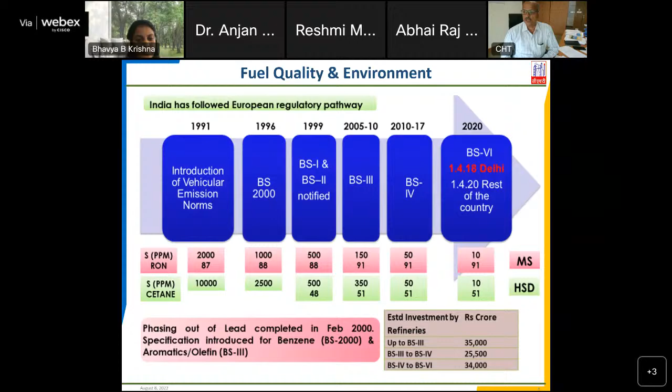Now the environmental consideration: the main objective is to remove carbon from our operations. We will only require hydrogen in future.

Next, I'll go to primary energy as per the IEA. In 2019, we had 900 million tons of oil equivalent in primary energy, and they have projected different scenarios.

One is STEPS, the Stated Policy Scenario. Because of COVID, they introduced one more scenario, the delayed recovery in the post-pandemic world. The Indian vision is the third scenario, and the most optimistic is the Sustainable Development Scenario, where you have to meet all the agreements and environmental targets. In all four scenarios, oil demand, which is around 230, is going to increase, except in the last scenario where it's a marginal increase.

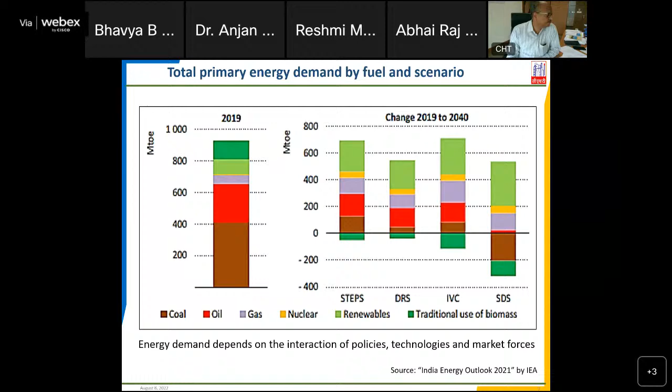As per IEA, these are the different policy scenarios I explained.

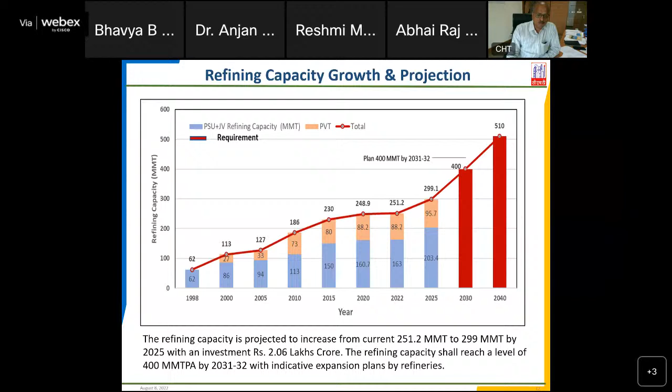Refining capacity projections: we are now at present 251 MMT per annum. With approved plans, we are reaching around 300 by 2025. Our demand required will be 400 MMT by 2030 and 510 by 2040. As such, we are in surplus in refining capacity. We are exporting products and want to maintain that lead position in exporting oil to the rest of the world. So there will be 2.06 lakh crore investment required for going up to 400 MMT capacity by 2030.

So what are the challenges? Volatile crude prices and cracks, sustaining refining margin and profitability. Our friends may be aware that in the oil industry, now all the oil companies have declared huge losses. Issues of water availability and land for new refineries is also one of the major issues. And building flexibility, fuel versus petrochemicals - fuel demand is shrinking and petrochemical demand is increasing. And climate change - we have to meet the climate requirement, so emissions from our operations have to be reduced. We have to divert into green hydrogen, biofuels, SCNG, etc. And disruptive technology - what is the impact on oil demand, which is a long-term threat to the oil refineries.

If you see price volatility, it is hovering around 140 and now again come to above 100, sustained post-pandemic. So refineries are more competitive when crude prices are low. When it is high, then they have a problem because prices are controlled. We are not passing the full price to the customers because of the developing economy, and our consumers also - government is very sensitive to increasing the prices and passing it on to the customers.

Sustaining refinery margins and profitability in the current scenario - typically refinery accounts 6 to 10% as fuel and loss, and reducing this will improve profitability. We have a benchmarking study of all the PSU refineries, there is an equivalent of $1.08 benefit existing by reducing the energy intensity. The most energy efficient plants have small steam systems, but we have very big steam systems, steam-driven turbines and all those things. So that has to be reduced, and we have to go for power systems.

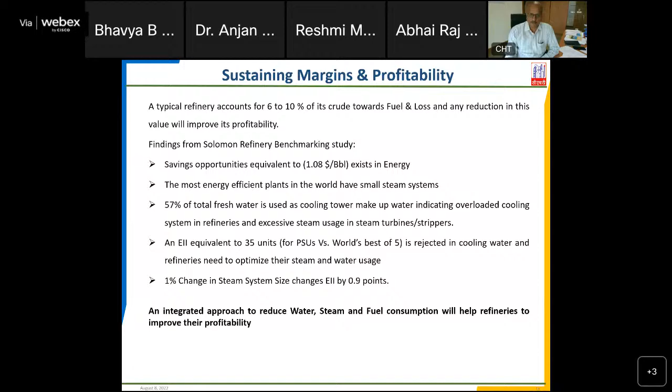Second, the water crisis - our refineries consume 70 to 170%, depending on their location, more than crude throughput. For 1 ton of crude, we require 0.7 to 1.7 tons of water. Water is more scarce in the coming future, so there is pressure on industry to recycle water and minimize fresh water makeup. We have seen refineries putting up desalination plants, like MRPL, CPCL, and even in Mumbai there is a huge water cut for refineries when summer comes. So this is also one of the challenges for refineries.

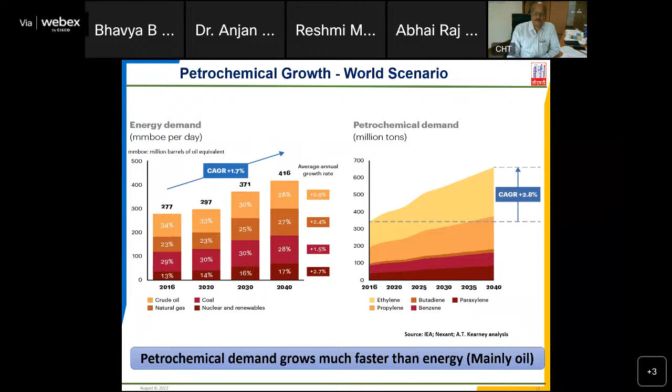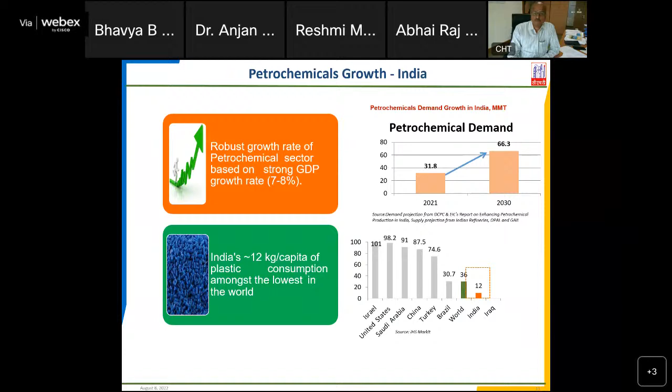Sorry, somebody is sharing something else. Hello? Sir, can you please reshare it, sir? I think somehow it's got cut, we're not able to see your slides now.

Yeah, there is a growth in petrochemicals. Now we can see your slide. There is a need for integrating refinery with petrochemical, since oil, there is a growth in petrochemicals.

If you see climate changes, as you are aware, 17 of the last 18 warmest years on record have been since 2001. 410 ppm CO2 concentration is the highest level ever. The rate of ice mass loss in Antarctica has tripled in the last decade. Global sea level rise in the last century has been about 8 inches.

However, these are the impacts to the refineries, because refineries emit scope 1 emissions more, and there will be pressure on refinery operations. The scope 3 emissions, whatever fuel they sell in retail outlets or to consumers, is also a factor. There is pressure on refineries to reduce their energy intensity, as Indian refineries by design consume more energy than their peers in the world.

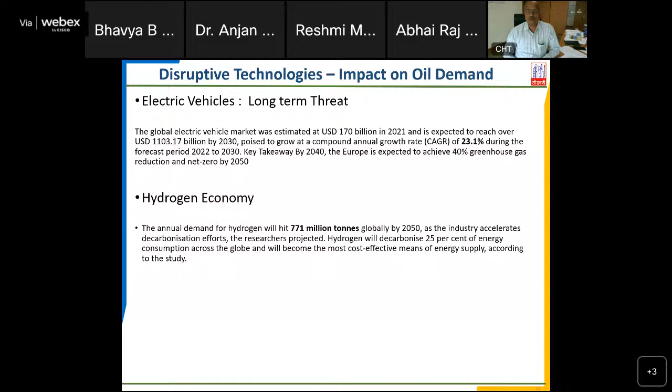Now, what are the opportunities and pathways for the refineries? Refinery integration is key to future sustainability. You have to align with biorefineries, petrochemicals, hydrogen, and feed diversification, to improve and sustain your operations in the near future.

For petrochemicals, there are different products required, and refinery gives excellent feedstock for production of petrochemicals. The indicative IRR of a typical standalone refinery is 11 to 12%. If integrated with petrochemicals, it's 16 to 17%. Most PSUs started with fuel refineries because there's an obligation to meet customer requirements. Now with fuel demand shrinking, we have an opportunity over the next two decades to increase the intensity of petrochemicals from our refineries.

For biorefinery, government has mandated increasing ethanol blending in MS. By 2030, it has to reach 20% ethanol and 5% biodiesel.

So for biorefinery, you have to use biomass, treat and process lactic acid from C6 sugars - lactic acid, PLA, petrochemical, or ethanol is the route. These can be blended into MS, and reduce the energy import requirement of the country.

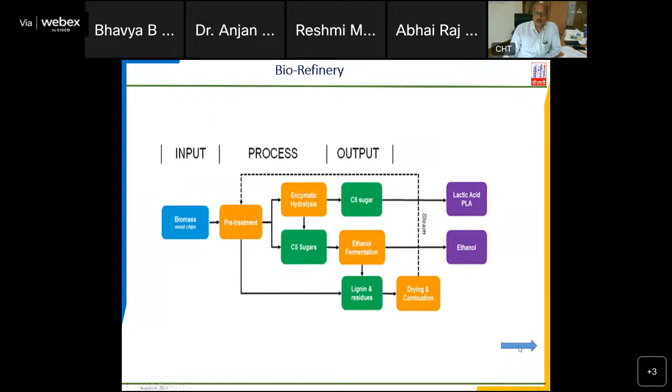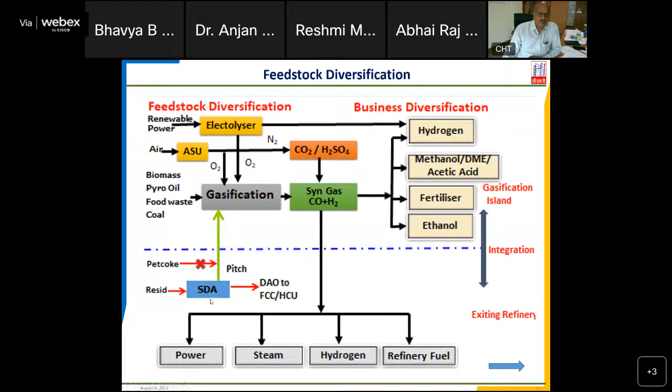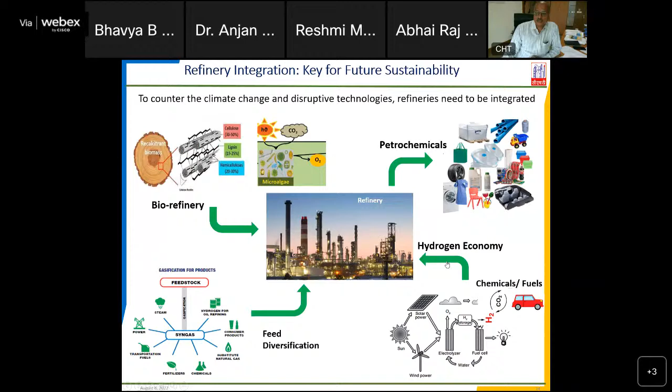Then hydrogen economy - green hydrogen is now a buzzword in the world. You have to produce it from electrolysis of water, and whatever CO2 you capture from hydrogen production, you use with green hydrogen to produce ethanol, fuels, chemicals, or fertilizers for sustaining operations.

So in conclusion, refineries have to diversify into biofuels. You have to produce sustainable aviation fuels - this is also one of the requirements. Now India, by 2026, CORSIA applies. In future, we have to meet green aviation requirements too.

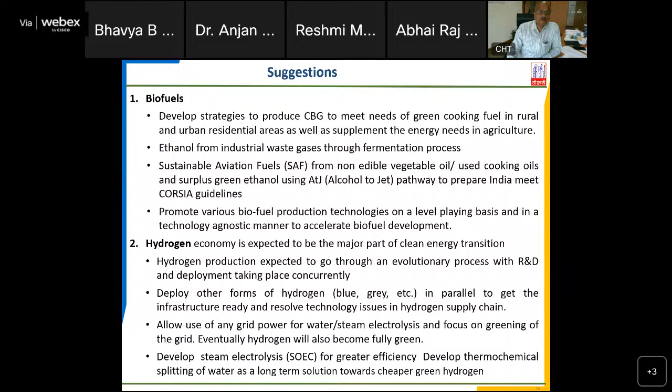Hydrogen is one of the areas. By 2047, India aims for energy independence. For this, we have to look into biofuels, hydrogen, and coal gasification to methanol. We have huge coal resources, so that will be sustained - you have to make methanol and use it for substituting oil and gas.

In refineries, at present some are still using furnace oil or LSHS. This has to be changed to gas to reduce their scope 1 emissions. There are leaks in SMR - you have to identify methane leakage through digital intervention, and subsequently it's captured for use as fuel. Solar and wind, wherever possible, should be used in our refineries.

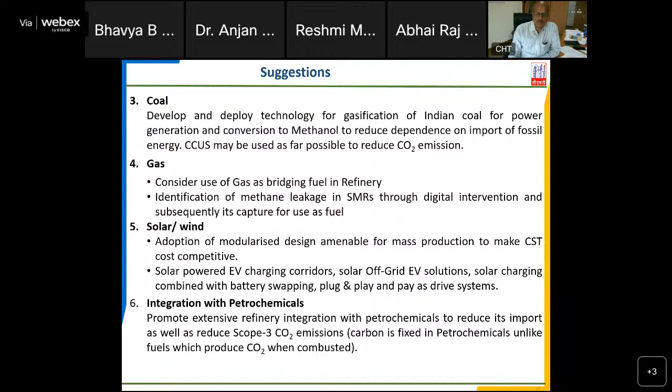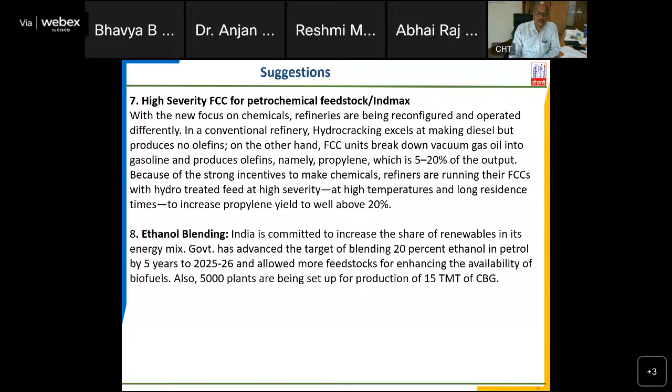Integration with petrochemicals - as already stated, even if you divert into petrochemicals, your scope 3 emissions will come down compared to producing fuels; petrochemicals will reduce the intensity of operations. High severity FCC and petrochemical feedstock technologies are available, and ethanol blending has already started, targeting 20% ethanol petrol by 25-26, with CBG as another option. Thank you.

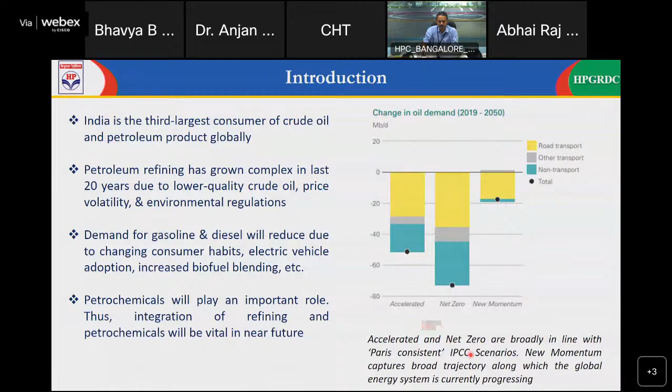So there is a lot of integration of the refining and the petrochemicals, and that's the talk of future integration in the refineries, and we are also talking about crude to chemicals. On the right side of the graph, there are three approaches: one is accelerated, second is net zero. Accelerated and net zero are broadly in line with the Paris consistent IPCC scenarios, and new momentum, where we will be achieving around minus 20 million barrels per day reduction by 2050. So new momentum captures the broad trajectory along which the global energy system is currently progressing.

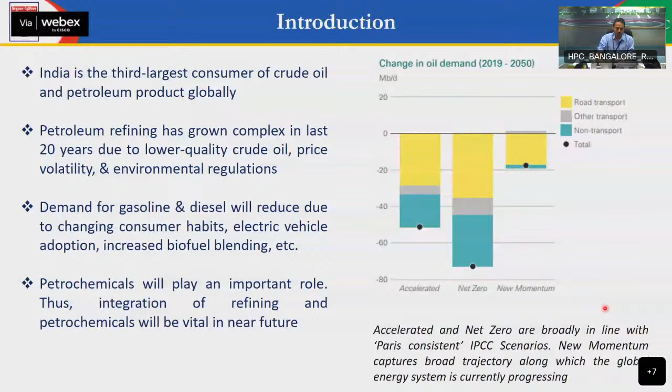So now if we see the timelines, how different technologies have emerged in the refining industry and where we are progressing. In the scenario of 1860 to 1920, mainly we had all primary processing units like ADU, VDUs and all. In 1930 to 60, FCC, alkylation, hydrotreating, solvent extraction came into the picture. Then 1970 to 1990, we have all bottom upgradation units like residue hydrocracking, gasification, dewaxing. From 2005 to 2015, the integration of petrochemicals with refining and high severity FCC came into the picture.

From 2015 onwards, there is talk of all green technologies, biofuels, drop-in fuels, green hydrogen, carbon capture and sequestration. Now 2020 onwards, there is a lot of talk and technologies coming in the area of crude to chemicals. It can be a deep integration or it could be a direct conversion of crude to chemicals.

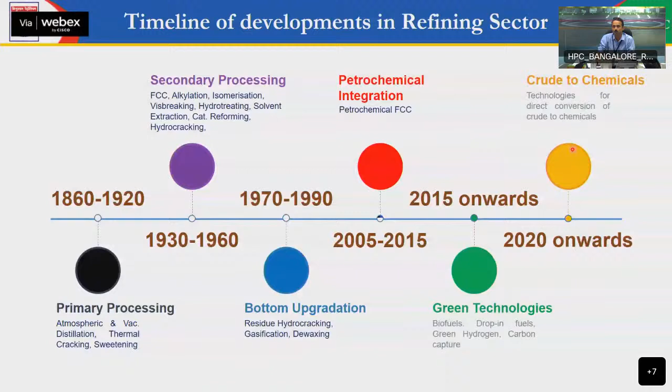So if we see the current focus of the refining sectors, mostly we are covering crude to chemical technologies, different catalyst and materials advancement. There is a lot of intensification on process and reactor designs, then carbon capture technologies, and going forward, there are a lot of activities or commercializations happening in the area of co-processing of renewables in the refining sector. So I will be subsequently discussing all these 5 topics.

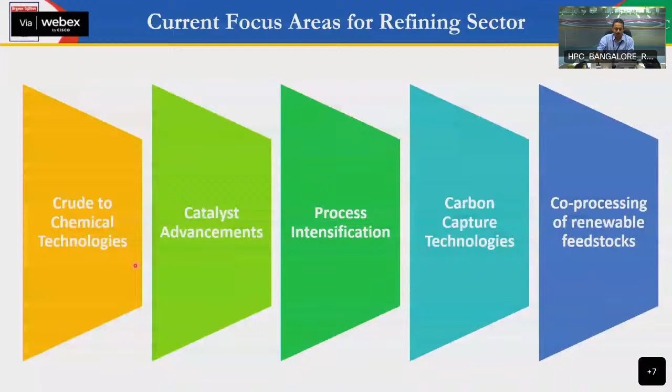So let's talk about crude to chemicals. If we see this GDP growth, the demand of olefins and aromatics from 2020 to 2050 is surpassing the GDP. That means there is significant demand of olefins and aromatics, and that's a key thing for the refining industries to go towards petrochemicals.

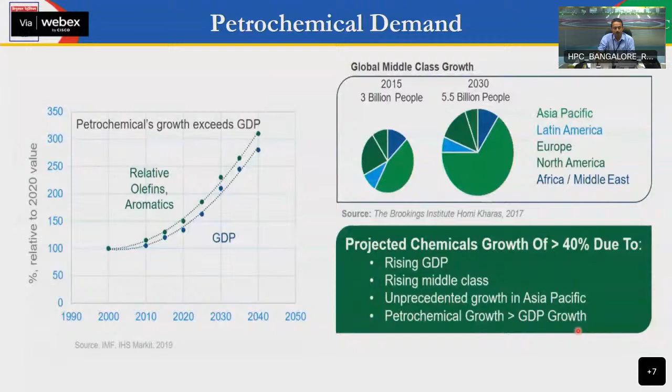The right side figure shows the regions of growth of the petrochemicals. It's the rising GDP, rising middle class income, then unprecedented growth in Asia Pacific, and the petrochemical growth is more than the GDP growth, followed by the growth in population.

So now going forward, how are refinery integration levels happening and what are the indicative yields? Broadly, if we see the refining industry, the petrochemical yields will be very, very less, maybe 4 to 5%. But if there is an integration like refining plus BTX or propylene, it can go to 10 to 12%.

Further integration leads to the refining industry - the naphtha coming from the refinery can go to steam crackers, or we can have a para-xylene complex that can increase the petrochemical yield to slightly more, maybe less than around 15%. But if we go to full integration like refining plus steam cracker plus para-xylene complex, it can go up to 15 to 25% of the petrochemical yields.

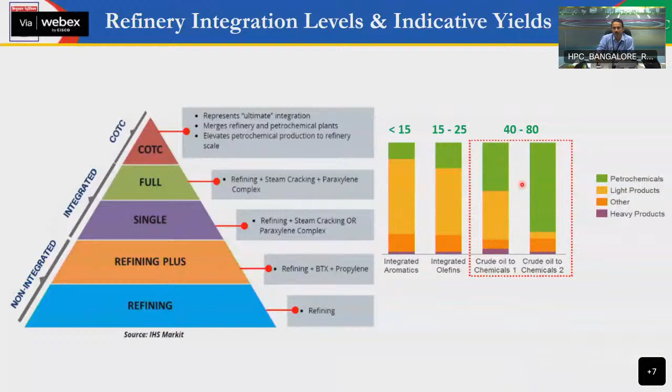But the ultimate integration represents merging all the refining and petrochemical complex in a more deep integration, which elevates the petrochemical production from refinery scales. So there we are talking about crude to chemicals, which can go to 40 to 80%, and there are currently 2 to 3 licensors offering such technology where the yields can reach up to 80% through deep integration. In China, there are a lot of complexes in operation wherein from the crude, the yields of petrochemicals are surpassing 55 to 60%.

So now if we see the transition path towards petrochemicals, I will deal with how the transitions are happening. One is the FCC - we know FCC is the main producer of propylene in the refining industry. VGO is the feed which can produce light olefins, and if highly treated VGOs are put into the FCC with a high olefin FCC, the propylene yield can go to more than 20% on VGO basis.

Then the next level of transition towards petrochemical could be a high olefin FCC plus naphtha cracker integration, which my previous speaker has also shown in the presentation. Then upgrading those streams in the existing refinery configuration can yield higher levels of petrochemicals.

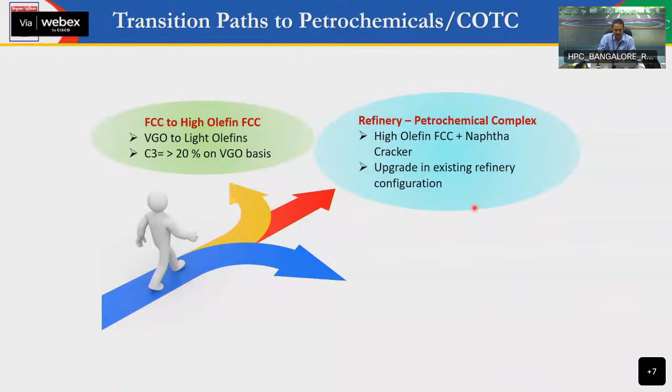The third integration, which we call crude to chemical, means the yield of petrochemicals is more than 40%. There it could be steam cracking - there is a plant running in Singapore which takes light condensate crudes and makes petrochemicals. Then it could be catalytic cracking or integration with hydrocracking and steam cracking.

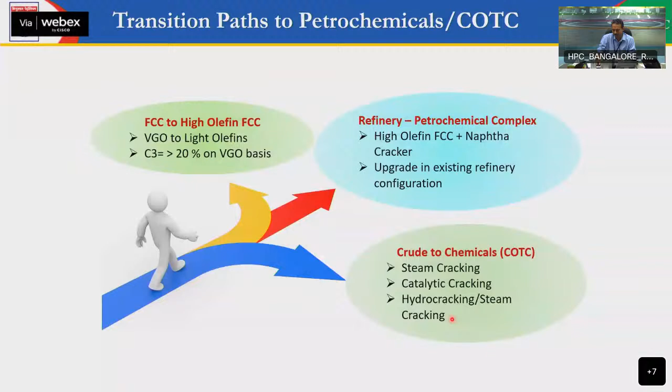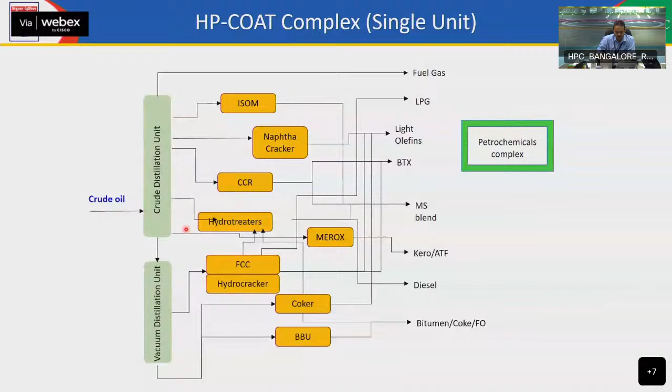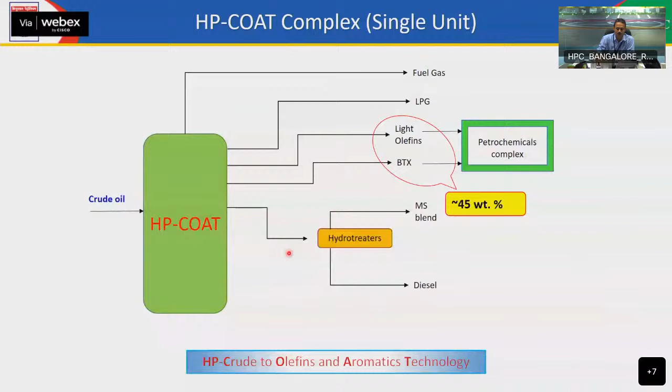So if we see the next slides, we are talking about taking the crude and eliminating all the units, and down the line we'll have only one HP-COAT unit, which has been patented by us, that will give directly from crude to 45% of petrochemical yields. So we'll not have any CDUs and VDUs, and whatever gasoline and diesel comes will go for mild treatment. So the refinery configuration will look very, very simple, having 2 units in the configuration other than the treating units.

So the next topic is about catalyst advancement. We all know about the production of clean fuels - we moved from 1991 with mass emission to BS 1, 2, 3, 4 and 6. Now we are talking about bulk metal catalysts towards Nebula or Celesia, or moving from type 1 models to type 2 models, wherein we can reach less than 10 ppm or even lower.

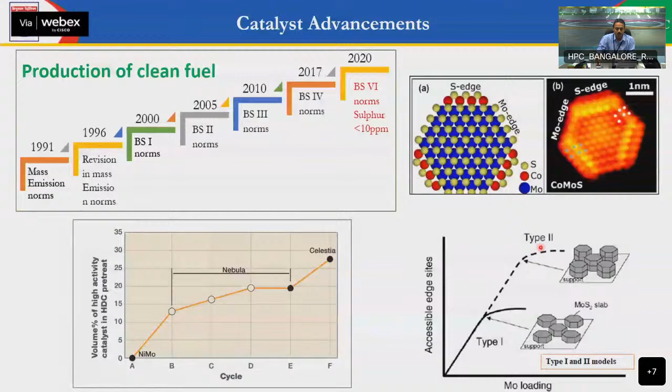So next is about bottom upgradation. If we talk about the different processes, I'll discuss what are the catalyst prospects and where we need to look into.

If we talk about FCC, there is the RFCC catalyst. To go for more upgradation from high CCR feeds, the catalyst should have a higher acidic matrix or use higher rare earth, but the limitation is we cannot go beyond, let's say, 7 to 8% of CCR or a certain percentage of metals, because this will lead to higher coke, which in resid FCC units will also have limitations.

So next is the fixed bed hydrotreating catalyst. AR and VR can be processed, but the limitation again is on catalyst cycle length, higher deactivation, and coke deposition.

So there are the challenges for the catalyst scientist, and there is an opportunity also to improve on this catalyst.

Next is about the ebullated bed catalyst. It's resid hydrocracking with a higher amount of metals and asphaltenes. The combination of meso-microporous catalyst support with good crushing strength can give higher conversion. But the major limitation will be spent catalyst handling, because so much of the metals and the CCRs along with the metals has to be handled. Another limitation will be sediment formation, because more than 1000 ppm will be difficult to handle. So there is again an opportunity and a challenge in catalyst development.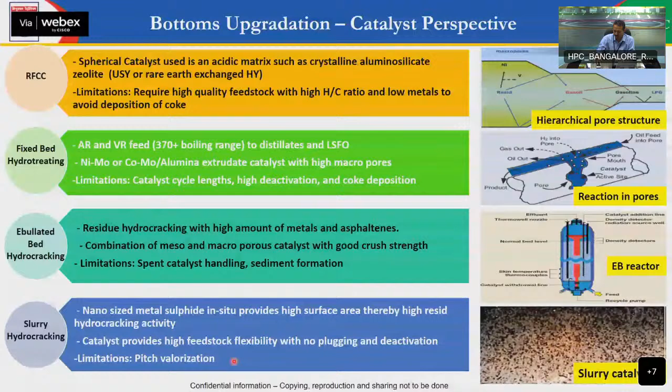So now I will put forward our HP Green R&D's approach towards catalyst development in such areas. We are working on developing a low cost catalyst, and we are also putting up scale-up facilities wherein whatever lab-developed catalysts are developed at our lab scale can be easily scaled up. So that moves towards the Atmanirbhar Bharat proposition of the Government of India.

Next, in the catalyst area, we are also working on single atom catalysts for improving the atom economy, like for the CCR catalyst. And we are also working on AI and ML model prediction for predicting catalyst formulation for new research areas like CO2 to methanol and other things.

Then we are also working on engineering the different planes of the crystals of the nano catalyst for improving the catalyst active centers, which helps in improving the activities. We are also looking into tandem and hybrid catalysts, which help in combining multiple reactions in a single reactor, like CO2 to DME or oligomerization reactions. We are also looking into heterogenizing the homogeneous catalyst for gaining technical advantage. That's one key research area we are looking into.

So the next area of research going forward is process intensification. If we typically see the definition of process intensification, it's like any chemical engineering development that leads to a substantially smaller, cleaner, safer, and more energy efficient technology.

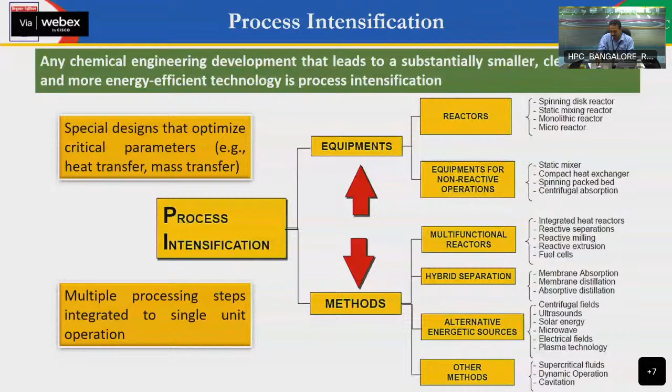So now what are the benefits of process intensification? It reduces the size of the equipment or the amount of process equipment. It reduces the capex and opex, and it's modular and prefabricated, so the time for construction of such plants can be much lower. It increases heat and mass transfer. It lowers the hydrocarbon holdup, so that way it is very, very safe. It can achieve a step change in corrosion management.

So there are various examples like rotating packed bed, divided wall column, where two columns can be combined into one. We can have micro channel reactors, or reactive distillation, where reaction and distillation can be combined into a single unit. So in rotating packed bed, HPCL has the HP high-G process for removal of H2S from refinery gas. That's one technology we commercialized at our Vizag refinery as well.

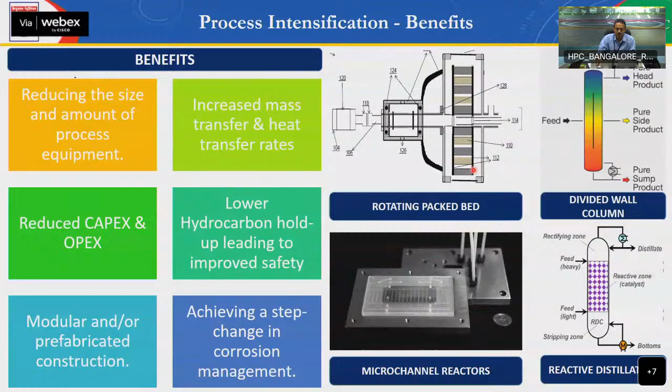So the next topic of my discussion is the net zero measures - where we are and where we are progressing in this direction.

If we see the major sources of CO2 emission in the refinery, this figure shows the different units which are the emitters of CO2, like CDU emits around 21%, then FCC is 23%, then SMR, which is one of the biggest emitters of CO2 per ton of hydrogen. These are the percentages of CO2 emitted in the refinery. Broadly, for processing 1 ton of crude oil, almost 200 kgs of CO2 is emitted in the refinery.

So there is ample opportunity for us to reduce the emission, and there is a lot of research happening in this direction to make the refinery CO2 free or minimize the CO2 to the extent possible.

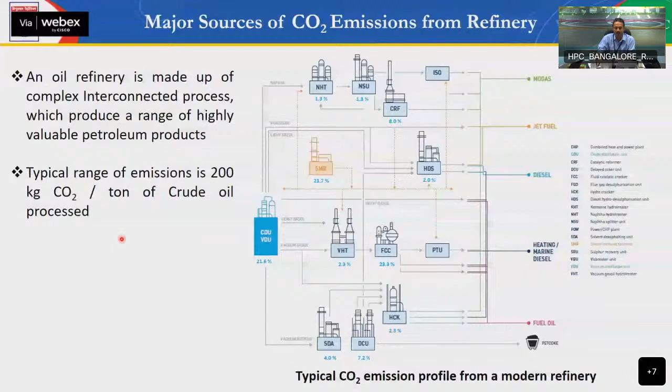There are novel different separation technologies for CO2 capture. One is the absorption process, which can comprise of the rotating packed bed or fiber film contactor, enzyme promoted amines, biphasic solvents, or ionic solvents. Second could be membrane separation, which can include polymeric or hybrid membranes, or different adsorption processes like vacuum PSA, TSA, carbon-based adsorbents, MOF materials.

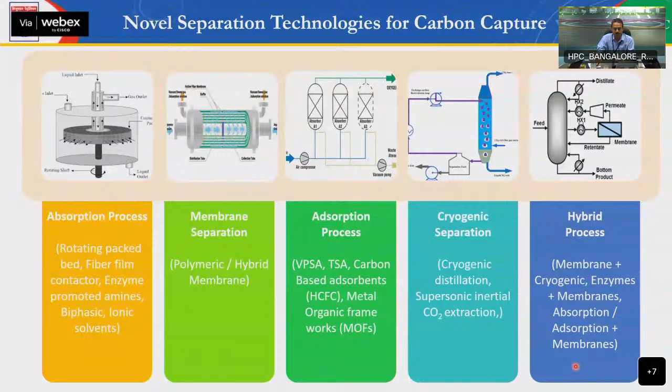Then there are cryogenic separation methods like cryogenic distillation, supersonic inertial CO2 extraction processes. There could also be a combination of different processes, hybrid processes comprising membrane plus cryogenic, or enzymes plus membranes, or absorption or adsorption plus membranes. These can help us in CO2 capture from refinery streams.

Next is the co-processing of renewable feedstock. There is a lot of talk on this, and many refineries outside are implementing certain technologies into refinery assets. The co-processing of biogenic materials with fossil fuels will play a key role in CO2 emission reduction from refineries, and the transformation of biogenic feedstocks and intermediate distillates to produce finished fuels will have less CO2 footprint. These will be cost effective options utilizing existing infrastructure to produce renewable hydrocarbon fuel, without requiring add-on investment in fuel distribution, because these fuels from renewables will be compatible, and existing infrastructure can be used for movement and transportation.

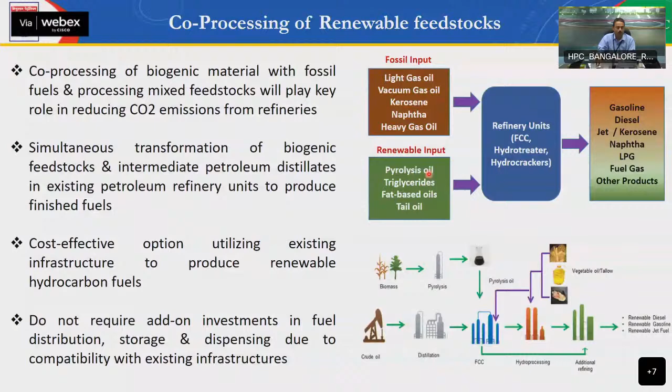Down the line, other than fossil inputs, the inputs will come from pyrolysis oil or triglycerides, fat-based oils, or tail oils, which will produce fuels having a biogenic component. There is a saying that it doesn't matter if demand for fuel declines due to more energy efficient engines, or the advent of electric or hybrid vehicles, or ride sharing, or any new technologies - what matters is when this will happen and whether each refinery is ready for it or not.

Down the line, right now we are processing crude oil. In future, to meet requirements and move towards green, less CO2 footprint operations, bio-based feedstock could be another feedstock, CO2 will be another feedstock which is now waste, or any other waste streams. Down the line, we'll have low GHG petrochemical feedstocks and low GHG products. This slide shows the illustration of the concept of the refinery of the future, wherein there will be hardly any waste, and all waste will be converted into low GHG petrochemicals or fuels.

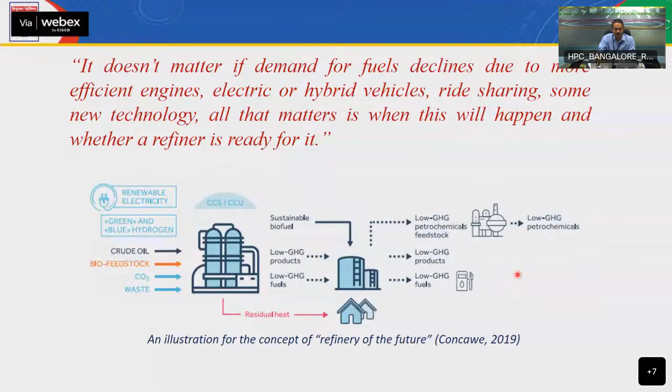So with this, I'll come to the end of my presentation. Thank you for patiently hearing.

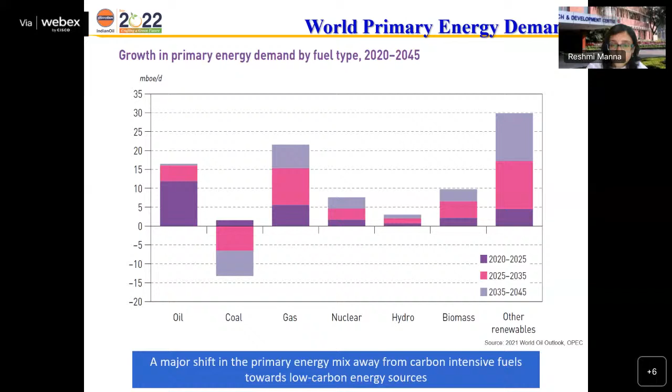This shows the share of how energy demand will be met by the different mix of energies. As seen, energy demand will mainly be met by gas as well as other renewables, and there will be a dip in the share of coal and oil. Till 2025 there will still be significant demand, so oil will hold its key position in the energy mix, and beyond that there is growth too, although much less.

Here is the energy mix which is again predicted, this is a study by IEA, World Energy Outlook 2021. If we see the world data, the total energy demand requirement increase CAGR is 0.8%. The oil percentage in 2019 is 29%, and by 2040 that percentage is going to reduce somewhat from 29 to 26%.

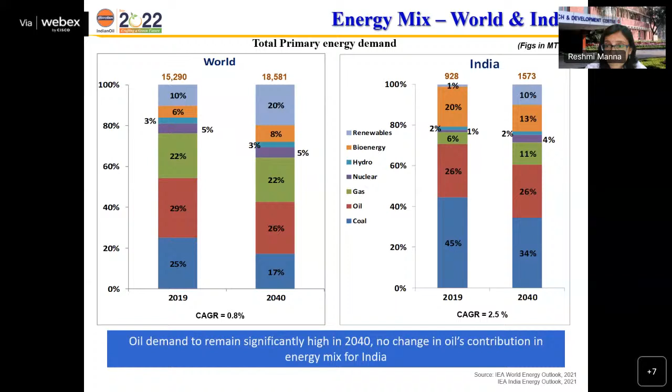But when we look at the data for India, the CAGR for energy demand, because of population, GDP growth and everything, is much higher than the world average. Also, although there is a significant decrease in coal's share of the energy mix from 45 to 34%, oil remains the same at 26%. So overall, in quantity, oil demand will continue in India for at least a few decades.

The major reason for this energy demand from oil is the demand for fuel. This is the STEPS scenario, already explained by my previous speaker. From 2019 to 2040, road transport energy demand is almost doubling. In 2019 it's around 100 million tons of oil equivalent, in 2030 it's slightly above 150, and in 2040 it's more than 200.

Majority of that demand is being met by gasoline and diesel. Although biofuels, electricity and others are there too, the contribution is mainly coming from diesel, mostly diesel and then gasoline. So as far as India is concerned, we will have this demand for these fuels from refineries, at least in the near future, for the next few decades.

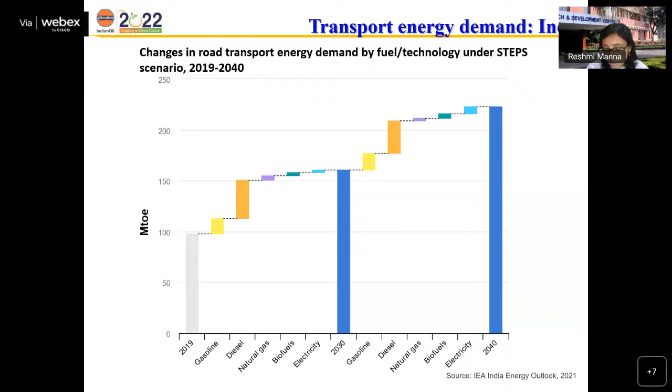Since demand will be continuing, there will be continuous growth in refining capacity. Presently we are at around 250 MMTPA, as also presented in my previous speaker's slides. From there, we are targeting 439 MMTPA of refining capacity by 2030, whereas domestic demand is 335 MMTPA. So the excess will be exported, giving India the advantage for exporting fuels and refining products.

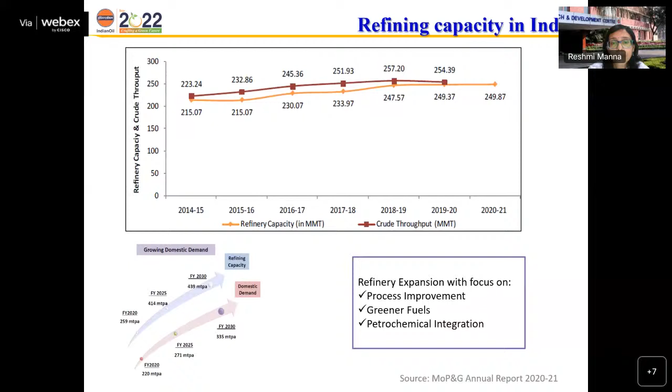Refinery, many of the refineries are under expansion, as we know. This refinery expansion will focus on process improvement, because demand is there, but we need to fulfill all the statutory and environmental requirements and norms. So refineries have to focus on process improvement, greener fuels, and petrochemical integration. This has also been spoken about, so I'm not going through this. All these refineries which are there presently have a total capacity of 249 MMTPA.

So what is the present challenge? I look at it in two ways: all this net zero talk is maybe the long-term future, and then there's short-term where there's no abrupt or drastic change envisaged, but slowly transition will take place. In this transition period, what are the challenges refinery is facing? One is crude variability, because crude oil is depleting and coming from various unconventional sources, so there are changes in quality, becoming more and more inferior. That's one of the greatest challenges.

Also there is an expected decline in fuel demand. Although in the Indian context the net amount doesn't decrease, the growth rate of demand will decrease due to electrification and ethanol blending in gasoline. Also maintaining high equipment reliability in the refinery, for all these operating units, will pose a great challenge in the refining sector in the near future.

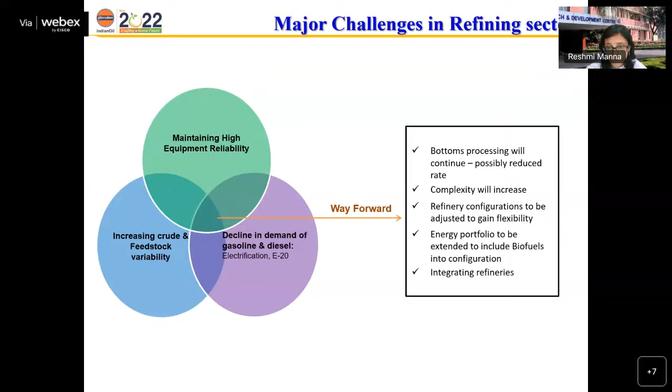So what I was talking about is crude oil variability. We can see how, with time, we used to get very good quality crude where API gravity was very high and sulfur was very low. But now the scenario has changed, and we are dealing with very difficult crude oil containing very high sulfur and lower API. To handle this kind of feed, refinery complexity keeps increasing, and the resid content in this crude is becoming more and more higher. So we need processing units to convert this resid into valuable products.

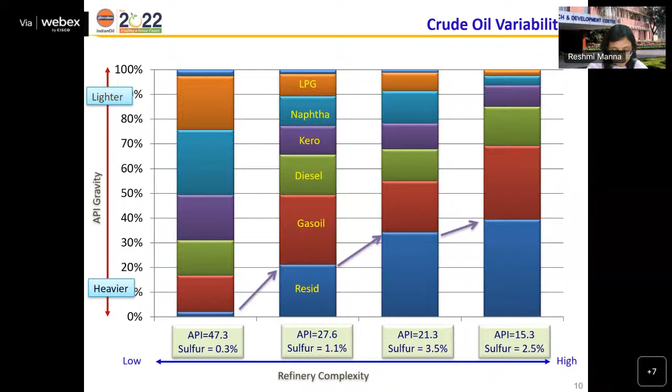Now coming to the refining scenario, what are the key drivers for refineries? First is product quality specifications that have taken place in the recent past. We've seen the transition to BS6, so I need not repeat it all. Now India is in the BS Euro 6 equivalent BS6 regime, where both gasoline and diesel sulfur content is less than 10 ppm. We have seen how there has been a smooth transition from BS4 to BS6 for meeting this sulfur limit.

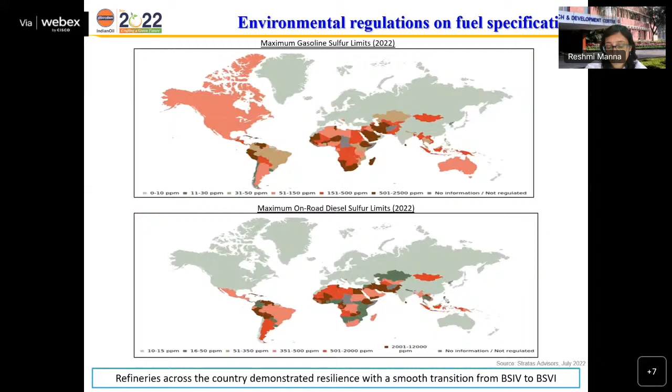How they achieved that: treatment units like DHDT, DHDS, either revamped or new; gasoline sulfur reduction units like Prime G or catalyst changes; OHC revamp; and all this treatment requires more hydrogen consumption, so there's been revamp or new hydrogen generation units. Also, there was revamp of VGO hydrotreater units or new units. This is how, over the past three, four, five years, refineries have made changes in configuration, adding capacity or altogether new units to meet these fuel specification challenges.

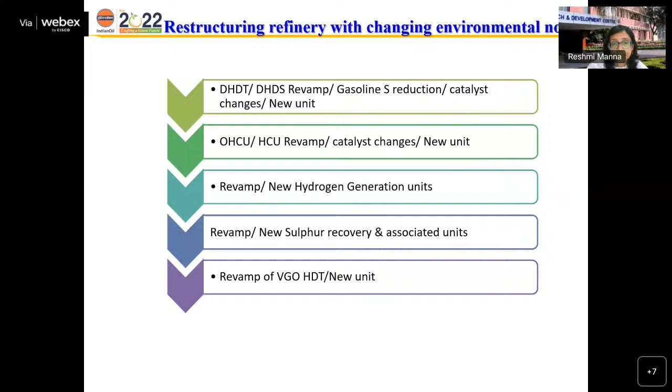In this context, I'd like to touch upon the technologies developed by Indian Oil R&D Center, which were focused on meeting fuel specifications for the transition from BS4 to BS6 and sustaining operations at the BS6 level. So these are the technologies we have.

indeDiesel is for production of ultra low sulfur diesel. indeHex is for production of specialty polymer or food grade hexane. Octamax is for the high octane gasoline stream. AmyleMax is another technology for production of high octane gasoline stream from light olefinic gasoline. Then we have indDSN, for production of ultra low sulfur naphtha. indDSK is for production of ultra clean kerosene. INDAdept is deep desulfurization of cracked gasoline through adsorption method. indJet is selective removal of mercaptan sulfur from ATF, and indSelect G is selective diolefin saturation technology.

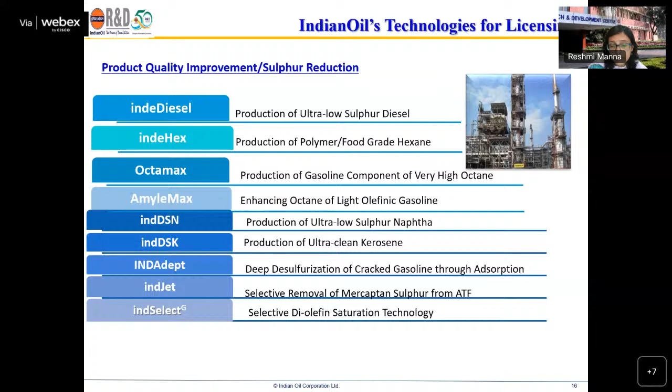So we have a bouquet of technologies for different streams, either for quality upgradation, sulfur removal, or octane improvement. I will touch upon some of these technologies and the features of these processes briefly.

So we have the indeDiesel technology. As already told, this is for production of ultra low sulfur diesel, sulfur less than 10 ppm, with an improvement of more than 10 units. There's an optimized feed preheat scheme offering cost effective design, and the catalyst is our proprietary catalyst, though commercial catalyst can also be used in this unit. The reactor internals are also proprietary.

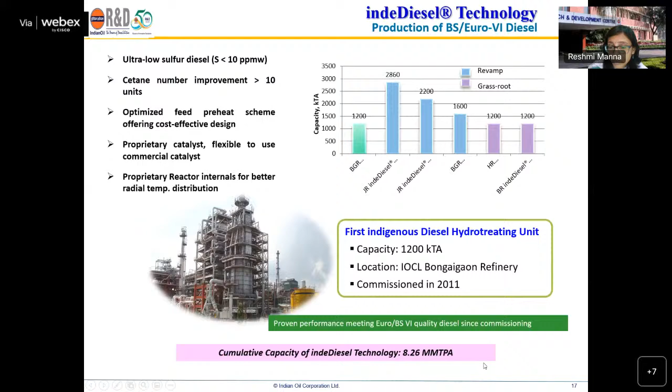The first commercialization of this indeDiesel technology was back in 2011, much before BS6 and even before BS4, at the Bongaigaon refinery. Subsequently there were many more grassroots or revamped units, taking the cumulative capacity of indeDiesel technology today to 8.26 mmTPA.

Next is the indSelect technology for gasoline desulfurization. This is a very specialized technology for selective diolefin saturation, as seen here. It's basically a two-stage process. In the first reactor, we have the SDS reactor for selective diolefin saturation. This is for upgradation of lighter gasoline, which selectively converts the diolefins into olefins, and the sulfur gets shifted to lighter mercaptans. LCN can directly go to the MS pool, with typically less than 30 ppm of sulfur.

There is also some change in the olefins. The alpha diolefins convert to central olefins, which enhances the RON of this light LCN stream. After the SDS reactor, there is separation and fractionation of LCN, MCN, and HCN. HCN goes to the HDS reactor for selective hydro desulfurization, so that sulfur is minimized while minimizing olefin saturation.

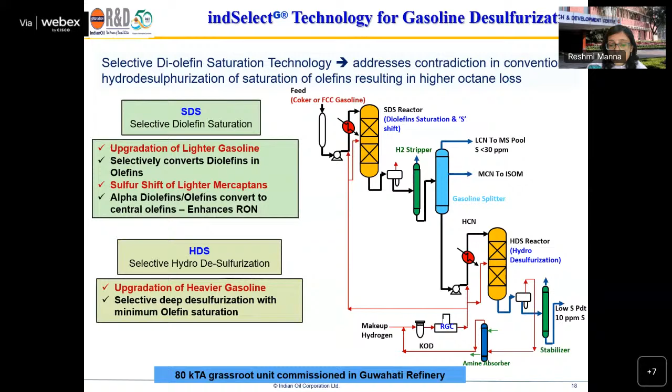So there is not very high olefin saturation, so that the octane number loss is not very high. This technology has very recently been commissioned - an 80 KT grassroots unit has been commissioned at the Guwahati refinery very recently.

Then we have the Octamax technology for gasoline octane enhancement. This is a very simple technology requiring moderate capex and opex, where we use the cracked C4 stream coming from the FCC or coker type unit, which gets converted to gasoline range molecules. Depending on if the feed sulfur is low, it can be directly blended into the gasoline pool. This technology was first commercialized at Mathura refinery in 2018, and subsequently there are many other plants at different stages of commercialization.

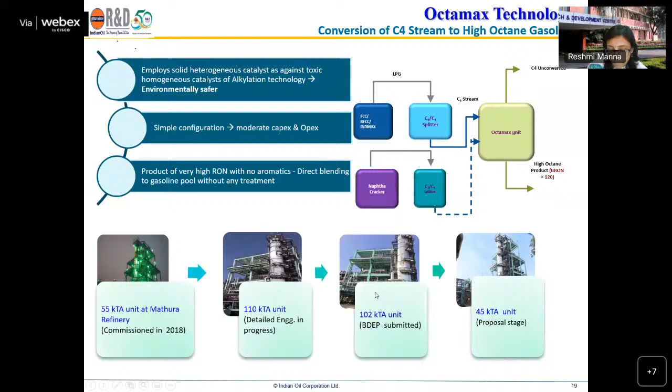Another significant achievement of work done by Indian Oil R&D Center towards fuel quality requirements for refineries is in the field of bunker fuel. As we know, with effect from January 2020, there was a new specification for bunker fuel. Previously it used to be 3.5% sulfur, but it was drastically reduced from 3.5% to 0.5%.

The conventional approach for making bunker fuel used to be mixing cutter stock with low sulfur VGO, which requires more cutter stock to maintain 0.5%. So Indian Oil R&D Center came up with their own scheme, employing one idle visbreaker unit at the Gujarat refinery. This 1 mmTPA VBU was revived, and by this scheme, bunker FO meeting the 0.5% specification was finally produced. I'm very happy to share that IOCL became the pioneer refining company supplying MARPOL compliant bunker fuel in India from September 2019, even before the IMO deadline of January 2020.

So these were the technologies for product quality enhancement and specification requirements.

Now coming to the topic of integration with petrochemical complex. This has already been covered in detail by my previous speaker, Mr. Pramod Kumar, but nevertheless I will also speak on a few points on what we are doing here.

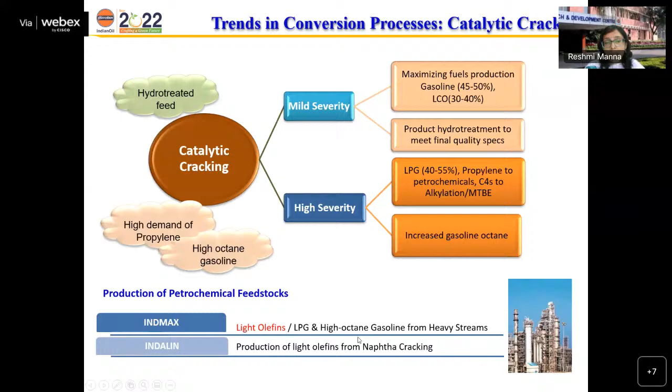Coming to INDMAX, I think it's already known by many. It's a very flexible process with an optimum riser, and other process conditions like matching hydrocarbon partial pressure and minimizing hydrogen transfer reactions in order to increase light olefins. We use a proprietary catalyst in this technology.

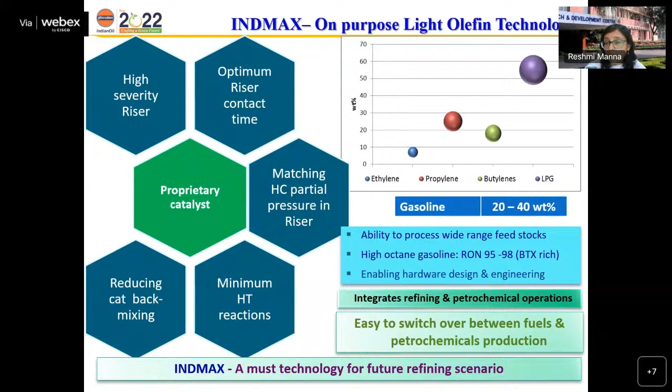Propylene yield can be as high as more than 20%, depending on the type of feed. It can process a wide range of feeds - very heavy feed with high CCR, and also lighter feed. This gives flexibility for the refiner depending on requirement, because the catalyst formulation can also be changed towards maximizing fuel or maximizing petrochemical feedstock like ethylene, propylene, butylene. So that provides very high flexibility.

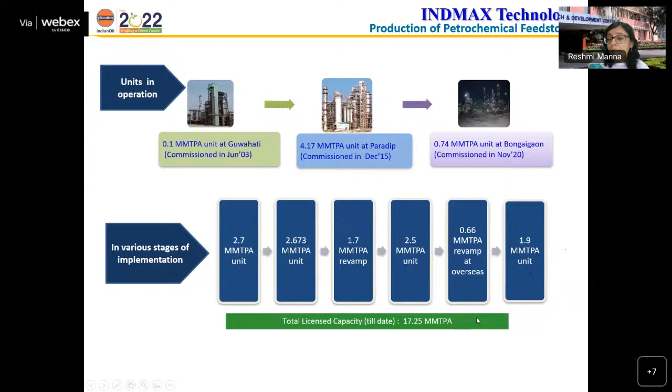INDMAX started its journey long back in 2003 in the Guwahati refinery with a small scale demonstration plant of 0.1 MMTPA. Subsequently we had a very big plant of 4.17 MMTPA in Paradip refinery and a 0.74 MMTPA plant at Bongaigaon refinery, with several other projects in the pipeline at different stages of implementation, taking the total licensed capacity of INDMAX till date to 17.25 MMTPA.

INDALIN technology is ready for commercialization. Here, in a circulating fluidized bed configuration, olefinic naphtha is cracked to a very high yield of propylene and high octane gasoline, which gasoline is again rich in BTX. So that also presents the opportunity for integrating with petrochemicals for recovering the aromatics.

With respect to feed, INDALIN can take any type of cracked feed, so there is flexibility in that. So INDALIN is also a technology which will be helpful for future integration with petrochemicals.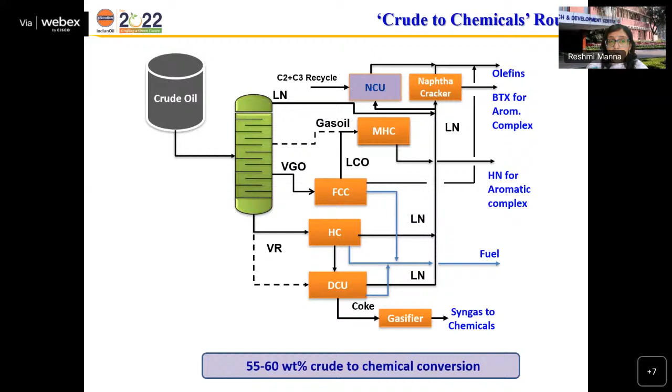Now the last point is bottom upgradation. Some of this has already been covered. In bottom upgradation, we mainly have two technologies in refining: delayed coking and resid hydrocracking, both having their pros and cons. Delayed coking is a very cheap option, whereas the yield of coke, which otherwise doesn't have much use, is very high - that's the negative point. Residue hydrocracking gives great fuel quality, but it's higher capex and opex intensive. So there is a need for improvement in these processes to enhance the refinery margin.

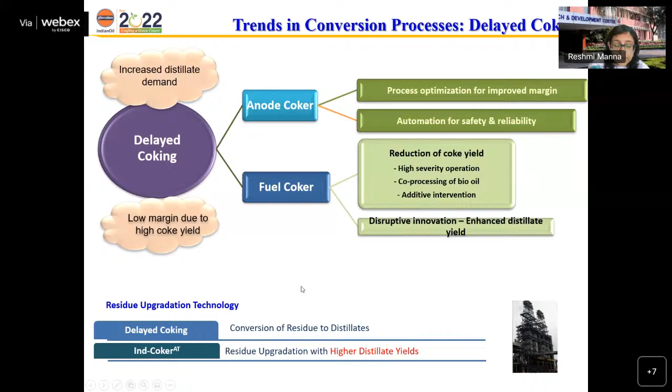In the delayed coking process, as I've explained, the objective should be as low coke make as possible. Indian Oil has its own delayed coking technology, which has been commercialized recently in the Barauni refinery through a revamp project, producing anode grade coke by employing low recycle. Compared to the base case, the coke yield was reduced by 4.4%, and energy consumption was also reduced by 37%. This is a joint technology by Indian Oil and EIL.

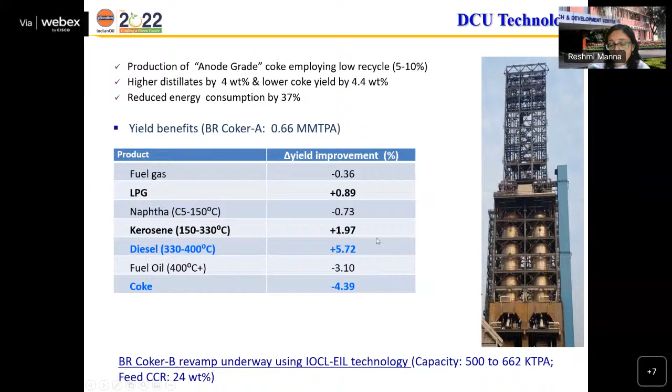One step further to delayed coking technology, there is the Ind-Coker technology, where even lower coke make is possible through an additional reactor section, which changes the reaction kinetics within the coker so that coke make can be further reduced. This has a highly attractive IRR and payback period, and utility requirement is similar to the conventional DCU. This technology is ready for commercialization, and commercialization opportunities are being explored.

On resid hydroprocessing, it has already been discussed by Mr. Pramod Kumar, so I'm not going into details. With the ebullated bed technology along with SDA, we are able to achieve conversion of 85 to 95%, and a couple of refineries are going to have this technology in the near future. Slurry bed technology has its own complexities, but here conversion of more than 95% is possible, and Indian Oil R&D Center is working on this slurry bed technology.

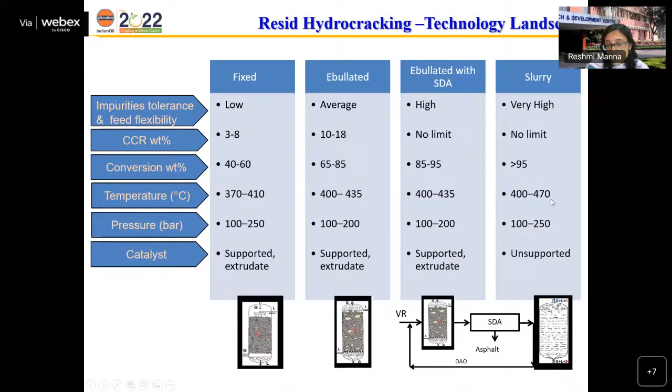Having said all this, what are the recent trends, what are we doing? Now coming to a glimpse into the future refining trends - maybe beyond 2030, what we are going to do.

We have the National Biofuel Policy. MOPNG issued the National Policy on Biofuel 2018, in which a target of 5% blending of biodiesel is proposed by 2030. It's stated in the policy that in-house produced used or waste cooking oil offers potential as a source of biodiesel production, and biodiesel produces 78% less carbon emission than conventional diesel. In line with this, LRE Petroleum Haryana is set to set up a biodiesel manufacturing plant based on used cooking oil, and blending bio oil in the refinery feed along with crude is another way of biorefining.

Talking about green fuel, the Honorable PM launched the National Hydrogen Mission on India's 75th Independence Day 2021, which aims to make India a green hydrogen hub. This will help meet the target of producing 5 million tons of green hydrogen by 2030. IOCL is set to build the country's first green hydrogen plant, where hydrogen will be produced by water electrolysis, powered by renewable energy. This plant is coming up in Mathura refinery, selected strategically owing to its proximity to the Taj Trapezium Zone, for curbing emissions. Other than Indian Oil, players like RIL, GAIL, NTPC, and L&T have also announced their plans for green hydrogen production.

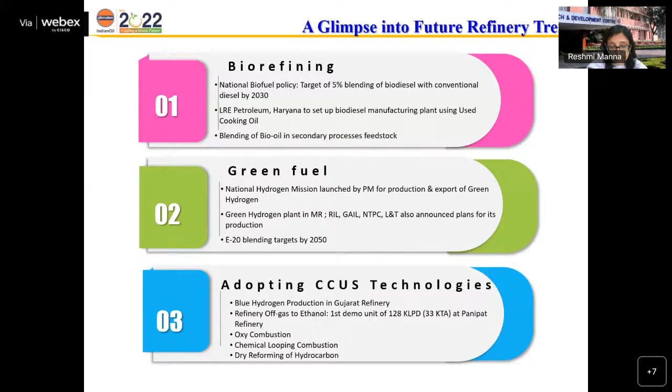To summarize, as we have seen, oil is expected to continue as a major primary energy source for at least a few more decades worldwide, and more so in India. Because of increased demand for both fuel and petrochemicals, India is planning for almost 75% increase in its refining capacity by 2030, which will strengthen India's position as net exporter of petroleum products.

In the short-term future, refineries have to reorient with the changing dynamics, like using latest technologies, advanced catalysts need to be used, and higher energy and operational efficiency is required.

In the refinery configuration, flexibility is required as per the requirement of crude, the product demand, as well as the crude oil, because there is no control on the crude which we are getting to process. So that kind of flexibility should be there.

And it goes without saying that it has to be petrochemical intensive. There can be value addition to other niche products also, like needle coke production from the delayed coker, or lube production from the refinery. So those are the other products which can be thought of.

The refineries of tomorrow, beyond the coming few decades, maybe beyond 2030 or 2040, have to be oil to chemical. At least 70% of chemical production should be there from the crude, and the power which is used has to come from renewable sources rather than fossil fuel generation power.

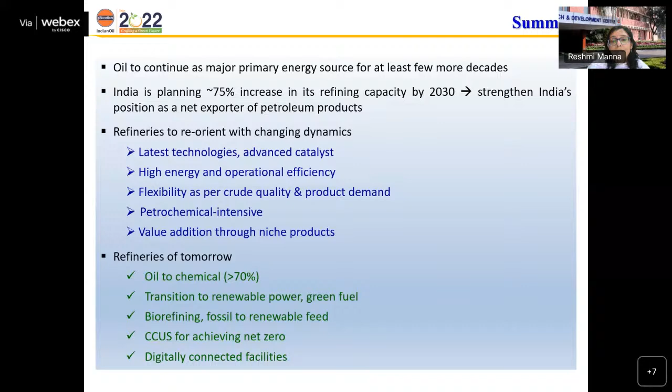Also, refineries have to be digitally connected facilities where through cloud-based systems, there can be auto monitoring and preventive maintenance for the most optimum operation of the refinery. So these are the things which have come to my mind regarding the future refining scenario - these are the must. Thank you, and thanks for your patient hearing.

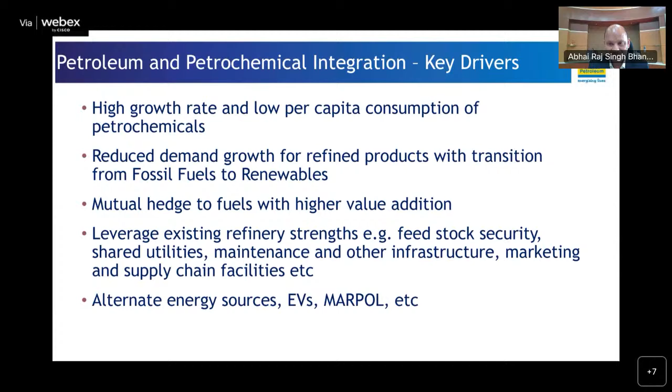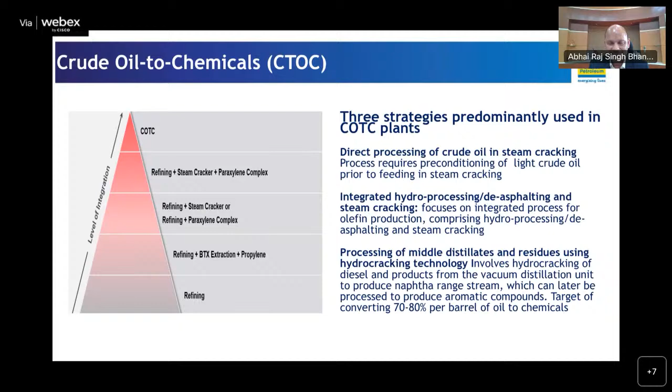Refineries are also preparing themselves for co-processing of biofeed stocks coming from various sources. It could be used vegetable oils, which will require changes in hydrotreating and hydrocracking catalysts. Similarly, there are other things like bio oils, lignin, or glycerol. So there will be enough flexibility in the refinery, and as and when the requirements for processing these things come, the refinery will be in a position to adopt and process with minor changes in configuration and major changes in catalyst development. So we foresee that refineries are flexible enough to take care of bio feedstocks coming in future.

The next slide, please.

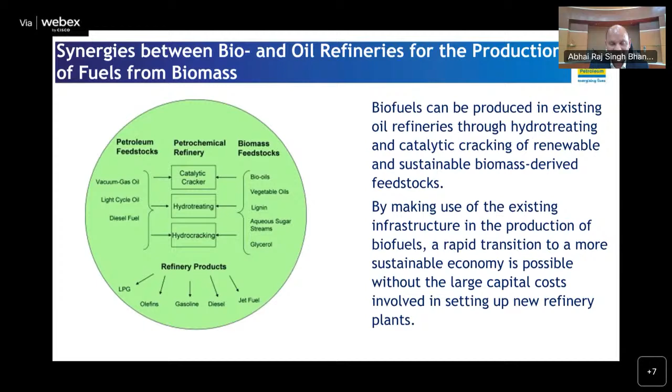Ethanol blending, we have already discussed. There is enough ethanol potential in the country. As we estimate from the available biomass in various parts of the country, there is enough potential to generate about 3,525 crore liters of bioethanol, whereas the requirement we foresee up to 2022 is almost 880 crore liters. So to meet the 20% ethanol blending requirement in MS by 2030, we do not foresee any shortage of bioethanol. In fact, our experience has been quite encouraging - when we went for procurement of bioethanol, a number of entrepreneurs came forward and established facilities for production of ethanol, because of which we were able to meet the 10% bioethanol requirement in MS blending ahead of time. And currently it has reached almost 11 to 12%.

Apart from energy security, there are so many other benefits of blending ethanol - whether it is reducing emissions, additional revenue, or employment generation.

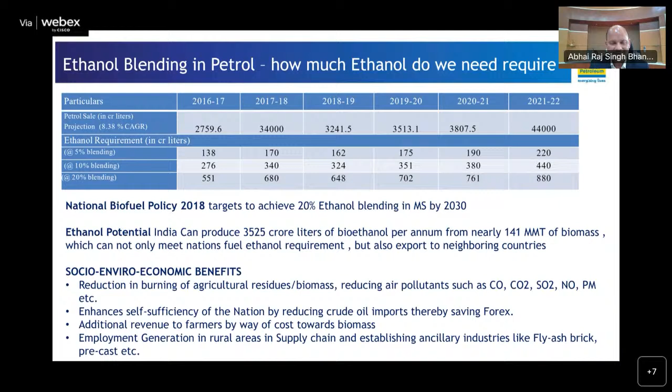So finally, efficiency improvement through digitalization. This is also one trend which has come very strongly in the refinery culture, and now we are seeing adaptation of digital technologies across various requirements - whether it is health, safety, and environment. This revolution is being driven by a number of startups, with companies working hand in hand with the industry to meet industrial requirements.

For various hazardous services, for example cleaning of tanks where there is a possibility of poisonous gases, robotic technologies have been developed and successfully employed in our tanks for cleaning. So those places where we used to send people, subjecting them to a lot of hazards, these things are now being done through robots.

Similarly, we are seeing a lot of efficiency improvement in critical installations like refineries with the application of video analytics based security systems. Whereas to man a periphery of about 12 to 15 kilometers of our boundaries, we required about 200 odd security guards, these have been replaced with smart cameras having various analytics based features.

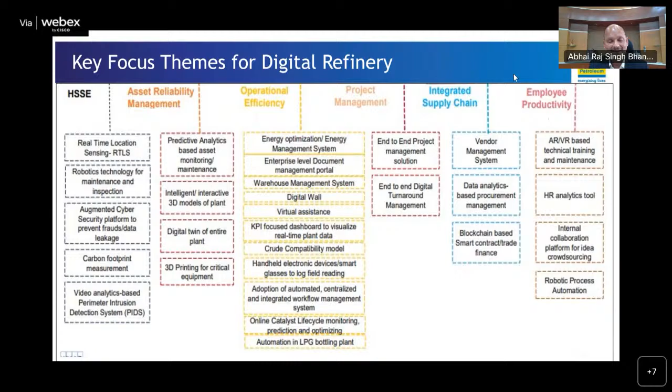Very exciting talk, Abhai Raj. Dr. Bhavya, back to you.